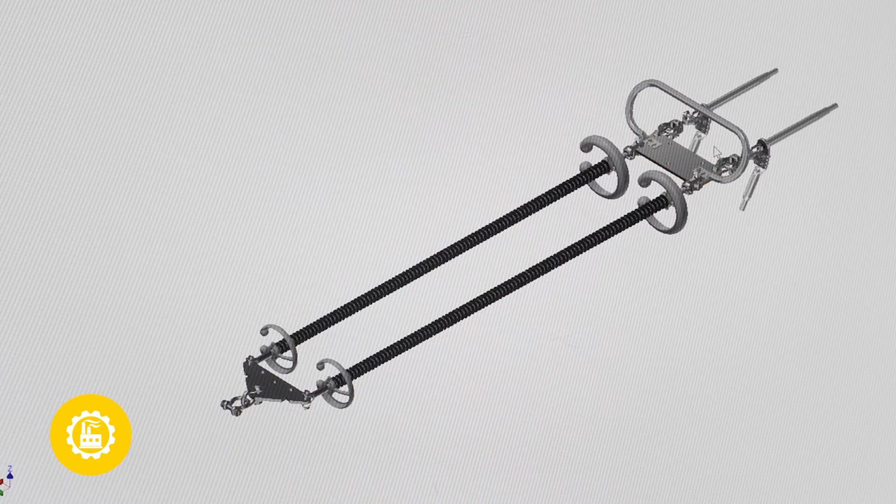4. Shipping and delivery. In our assembly design phase, we coordinate with the customer to ensure that our designs meet the requirement of the customer and the installation crews.

We accomplish this through our engineering team, which has combined experience of 200 industry years, and our sales team, with another combined experience of 67 industry years.

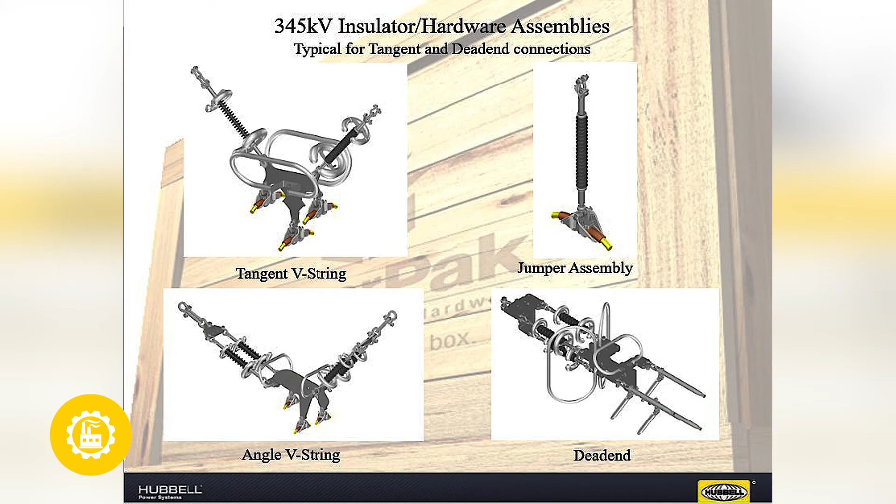We have standard transmission assemblies that make it easy for the customer to figure out what they want, and we also have the capability of custom designs if needed.

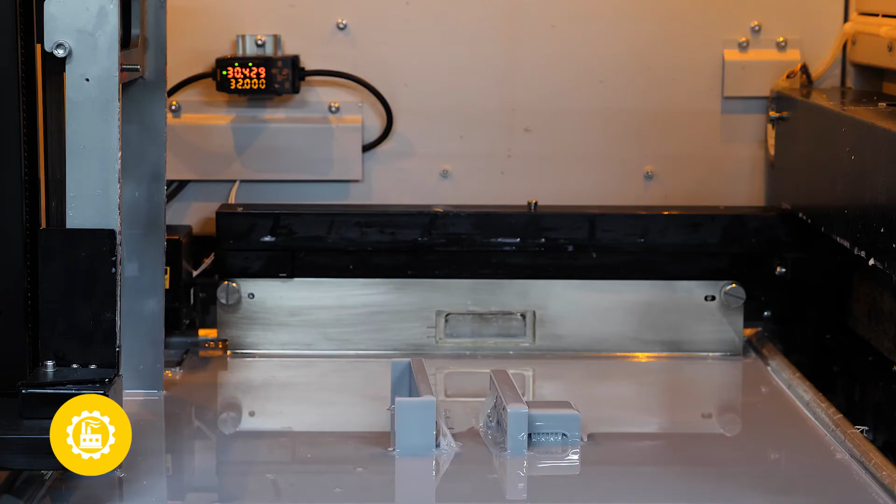With the help of our new product development team, pattern shop, and our state-of-the-art 3D prototype lab, we are able to design complex designs that meet the needs of the customer.

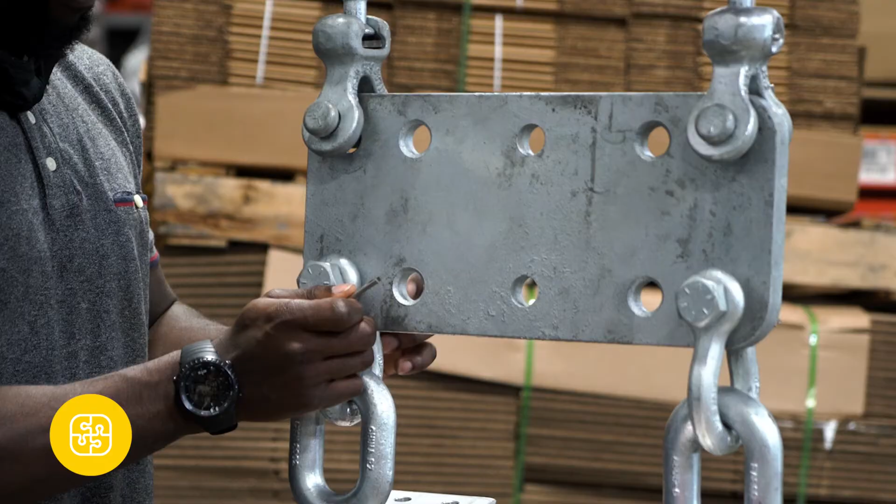After the design phase, we check the fit and form of our assemblies through our fit check process. This process is useful in catching any design irregularities or any incompatibility with a customer item.

We also offer Corona RIV testing for our projects to ensure that our design can meet the voltage level demanded of the assembly.

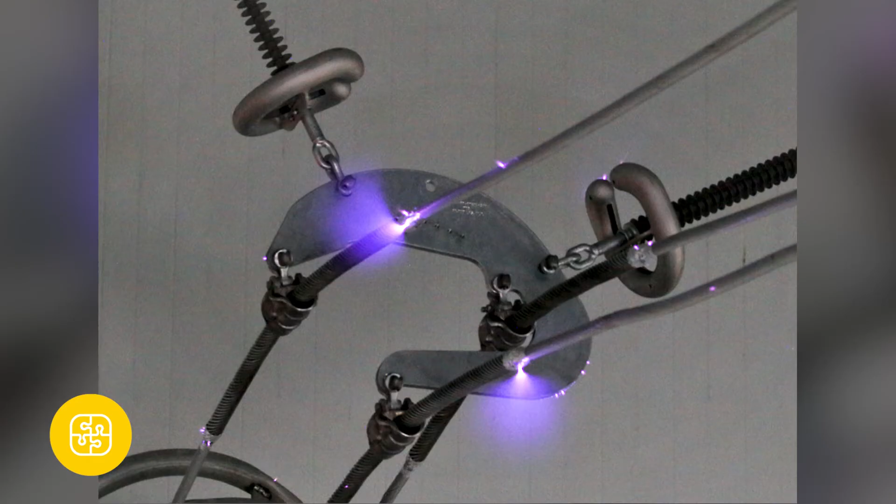In our packaging phase, we make it easy for you by packing to the customer or contractor specs. We have the capability of packing our assemblies in multiple ways.

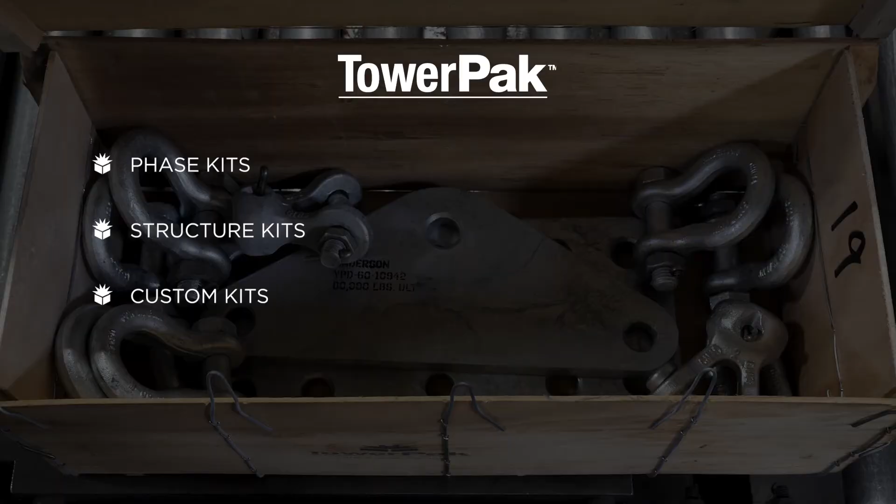Some of the ways are as follows: phase kits, structure kits, custom kits, bulk pack, partially assembled kits, etc.

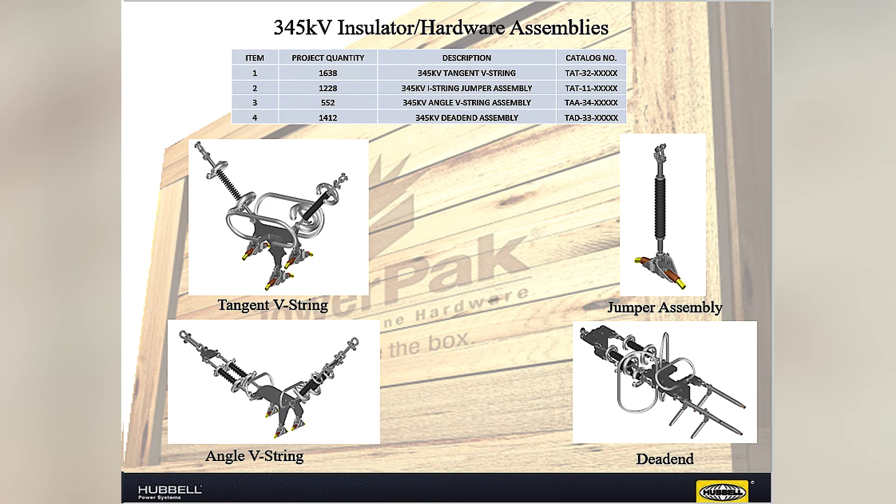We also provide detailed engineering instructions and drawings to make it easy for the contractor to read and follow directions. Our assembly info includes, but is not limited to, the following: part number, description or material, ultimate strength, weight, and quantity.

In our shipping phase, our products are shipped and delivered with the customer in mind. We make sure the package has all the info readily available and visible.

In summary, we strive to be a one-stop shop for all your needs while helping you reduce complexity in orders by reducing line items in orders and reducing the cost of testing.

Remove the process and cost of sorting in the laydown yard or warehouse, create needed products, gain an extra set of eyes while maintaining component fit and function, create an efficient construction process at the job site, and save time and money.